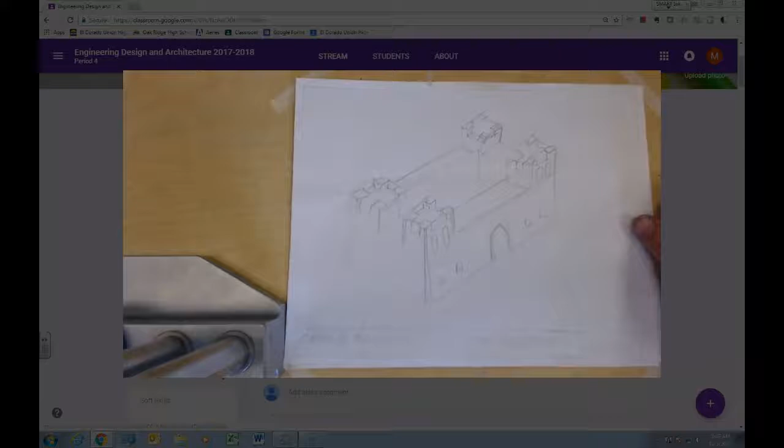When we did our castle in SolidWorks, I noticed a lot of you, when I took a quick look at your sketches, ended up with something that didn't look anything like your sketch. Some of you struggled once you got into SolidWorks because you went without a plan and started throwing patterns on patterns, and some of you dug yourselves holes while others did okay. Miss Musgrove, the architecture teacher from last year, subbed for my 5th and 7th period classes and did a demonstration about sketching. This is the sketch of a fictitious castle, an isometric sketch. Iso meaning equal, and metric meaning direction or measure, so equal measure. We're going to learn how to do that today.

I also want to show you examples of what I've done in my life. I rolled this cart in here as a demonstration. These carts that this box is on hold 3D printers that didn't have a place to go. We had 5 of them and needed a place to put them. These didn't exist at the beginning of the school year, but now they do because we made them in class. So how these went from an idea in my head to something in reality, well, I had to think things out a little bit.

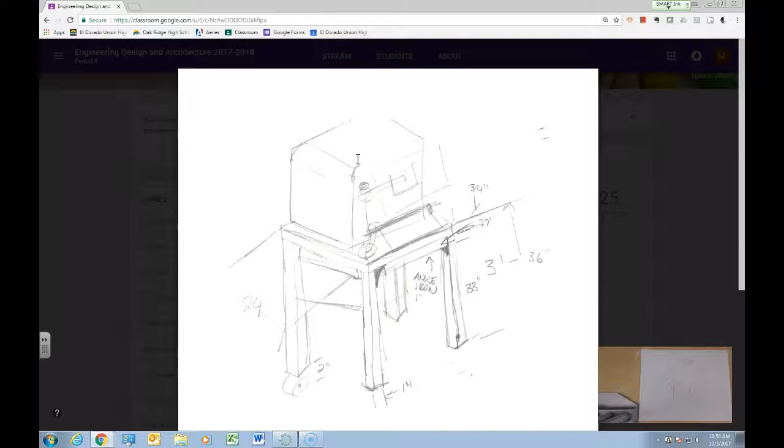We didn't 3D print this; we ended up cutting, sawing, and welding. But notice this started somewhere. This was back in July in the summer that I created this sketch on a piece of paper that looks relatively close to what we've got here. It's kind of faint and didn't copy well, but there's the monitor with this stand-up post thing. I even had to model up and draw these brackets that hold the monitor in place. I did end up going into solid modeling software to do these things, but the concepts, even those little brackets, started as sketches in my notebook.

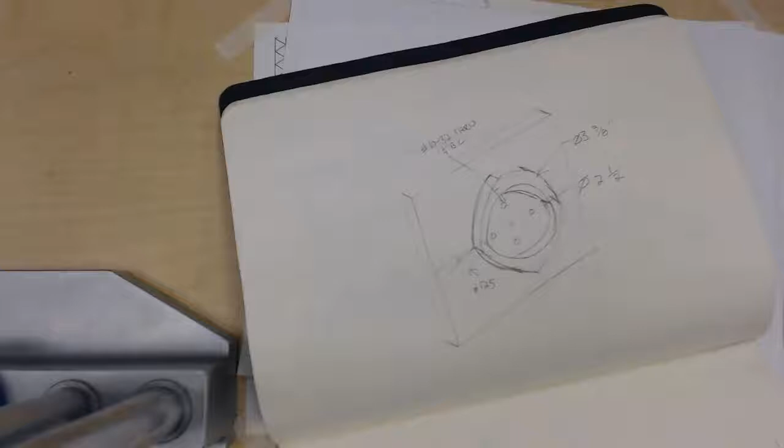Then I went to an isometric sketch by hand to get my ideas straight, so that when I went into solid modeling I had a bit of a plan before I started. And it came together pretty nicely. Everything fit. I was able to make solid models and generate G-code that ran the CNC machines out there to cut these aluminum brackets out. It was awesome, and it all started with a piece of paper, a pencil, and my brain.

So this is why we're taking a bit of a step back here, to give you some more tools in case the power goes out or something bad happens, or you don't have access to a computer and you need to get a concept started.

And I think you're going to be better off. So everybody cool? You got your ISO grid paper taped down to your desk there? That's easy enough.

Now what we've got here is your piece of tracing paper, okay? Everybody got a piece of tracing paper or missing that? Nope, so don't even worry. Who actually taped their piece of tracing paper down to their ISO grid paper? Nah, I didn't ask you to do that. Okay, so this is going to be free floating on top.

And this is actually going to come in a little bit handy here where we can shuffle things around. But anybody in here, you don't have to tell me, if you're colorblind - I had some students that had grayscale issues last year that struggled with this. Just let me know if that's a consideration for you. Hopefully the tracing paper on top will overcome this.

But okay, so this ISO grid paper - are actually, what type of triangles? I know it can be a little bit of a distracting thing here, but if you were to take a look at those triangles, what type of triangles are those? Equilateral - you got it over there, Rob. Equilateral, they are not isosceles. So isosceles would be two equal sides and one unequal base, but an equilateral triangle is sides that are all equal, okay?

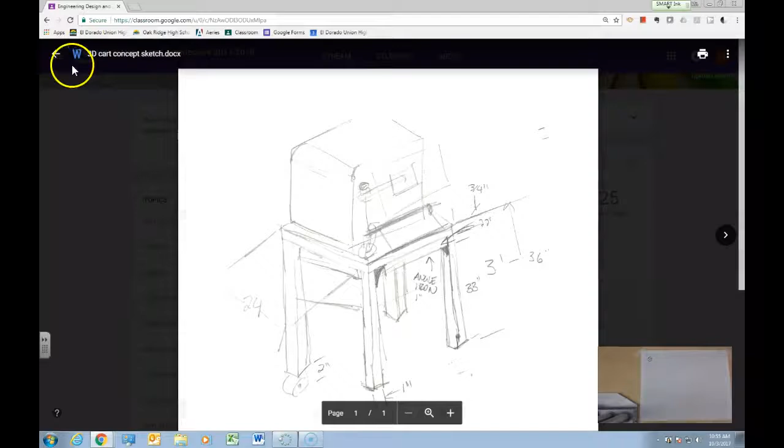Okay, so what I really need to do here, we're going to use Fred as our example because he's awesome and he's Fred. But we're coming back here. So we're going to want to take a look at Fred here, which hopefully is up on your other monitor. We're going to turn Fred from orthographic 3 view.

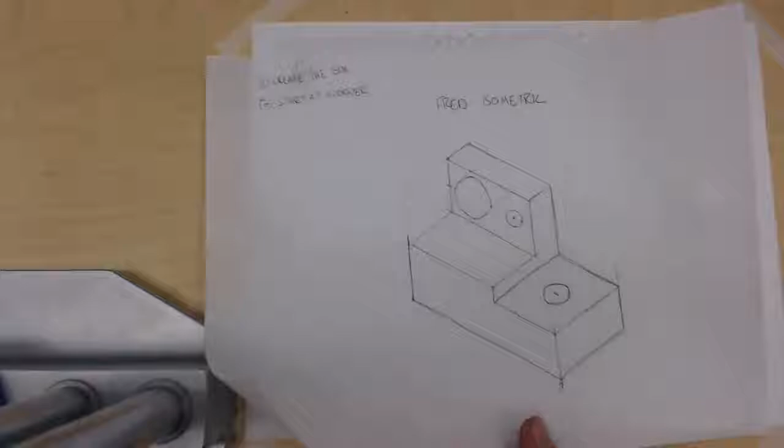So if you were a layperson, do you think if you showed this to your parents right now, they'd have an understanding of what the heck Fred is? No, right? But if you were to show them something that looked like this instead, they would be able to say, hey, guess what, that's Fred, right? So intuitively, this type of sketching makes a bit more sense than this other technical thing.

So make sure that you're able to look at this and refer to Fred here. I'm going to move this over to my other screen so I can refer to him. All right, so Fred's over on my other screen here. But you all got, I'm going to show you how we can draw something up like Fred.

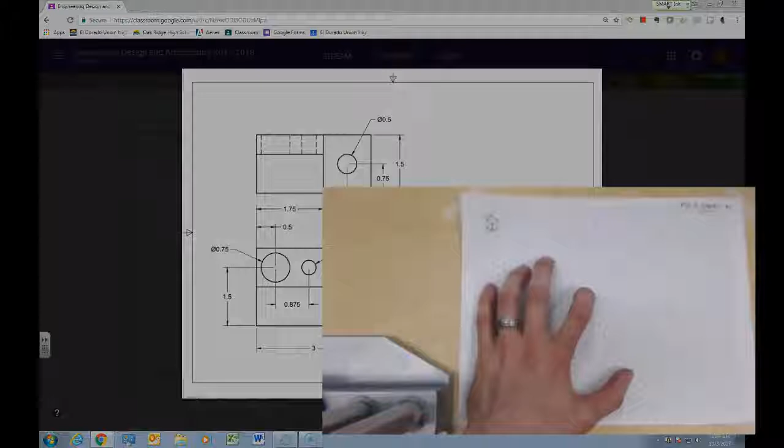All right, so here's what we're going to do: we're going to pick the highest point. We're going to start with either the highest point or the lowest point. I'm going to go for the highest point. So somewhere up, say right about here, and you guys can pick whatever you all want to do. You see I've got kind of a point up about right there that I've just created, right?

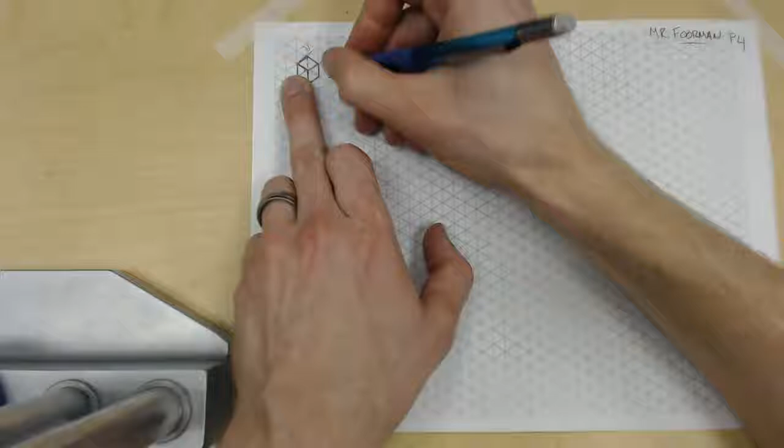Okay, so each length, if we come back and look at our unit cube right here, what we're going to call each one of those triangle shapes, that's going to be equivalent to 1/4 of an inch for us, all right? That's going to be equivalent to 1/4 of an inch, or 0.250, okay? I just did this recently, and it works out pretty well, all right? So each one of those is equal to 1/4 of an inch, all right?

So starting from this point here, and if we're going to go this direction, say, how many triangles do we want to count out to represent? That's going to be the 1.5 inch dimension, right?

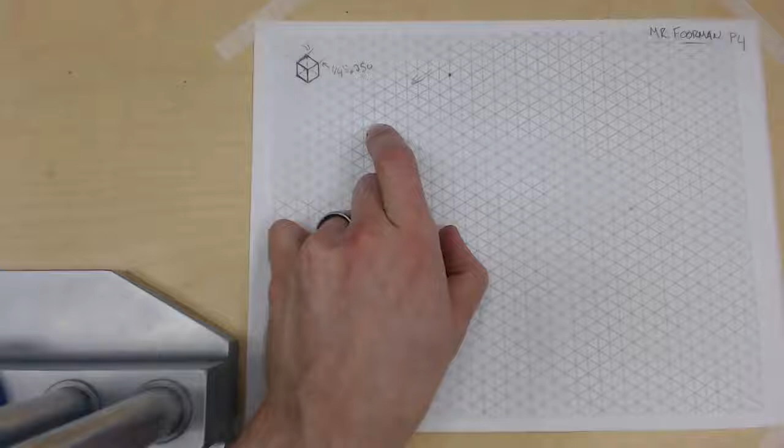Okay, so I think that sounds right to me. So let's try this here. I'm going to minimize this thing here.

So what we're doing right now is we're going to be drawing this 1.5 inch line right there, the thickness of Fred up at the top. I'm going to move this screen over here so I can see, then blow this back up.

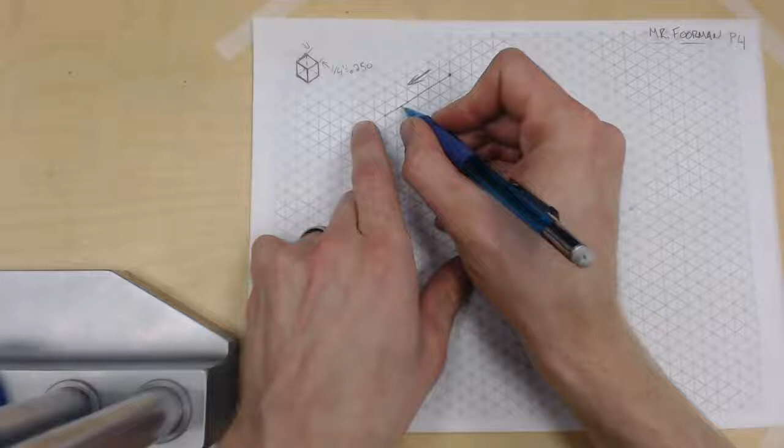So you guys count it out. That's 1/4 of an inch, that's 1/2 an inch, that's 3/4 of an inch, that's 1 inch. I'm going to put a little tick mark there just so I can keep it straight. And then another 2 - 1, 2, that would be 1.5 inches going this direction, okay? And then you can ever so lightly draw in between that there. You all catching that?

Okay, cool. So now where we theoretically are right now, if I actually pull up my actual Fred thing right here, can you all see that we actually started - that was this corner right here - and we've come off, and we'd be at a theoretical point in space, floating on Fred, somewhere right here, okay? That's going to be that point right there, if I align myself a little bit more.

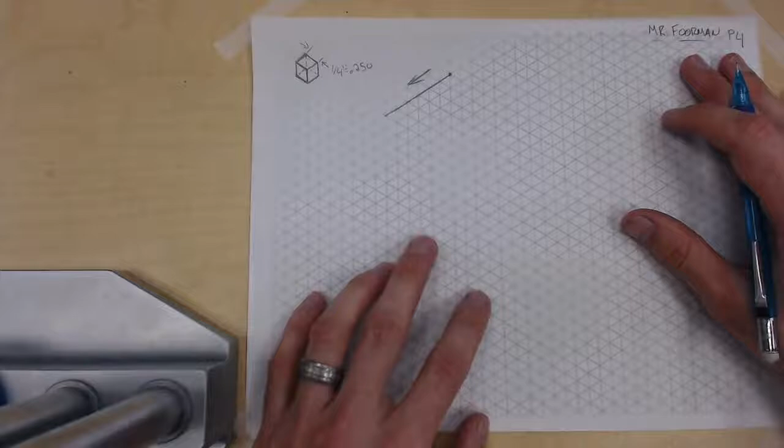So now what we're actually going to have to do is come downward with Fred. So now what we're looking at is from that corner - and I don't know how well my cursor is going to show up here.

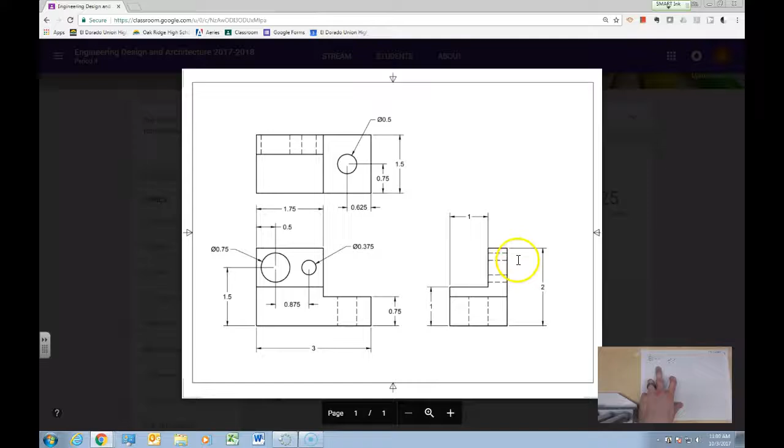We're going to be coming down vertically 2 inches from this point right here, going down that direction, equivalent to 2 inches. So how many triangle shapes is that going to be to represent 2 inches? 8. Very good, Lucas. So that's 1, 2, 3, 4, 5, 6, 7, 8. I'm going to put another little point down there, and guess what - I'm going to draw a straight line down right there, right?

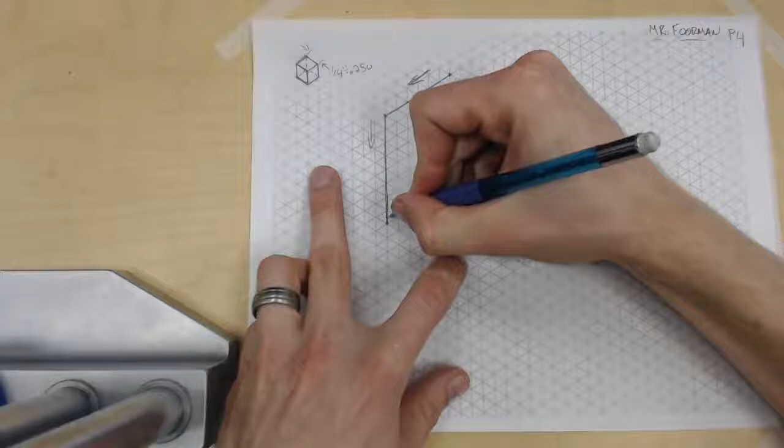Okay, cool. So now where we theoretically are on Fred is this point right here. This little point right here is literally that point on Fred right there. So now we're going to draw this line going that direction to the other point of Fred. So now we're going to do that.

How long is it, looking at your Fred drawing, from that point to the other one? It's 3 inches, right? Okay, so how many triangles do we have to count off - 12. Okay, so that's going to be 1, 2, 3, 4, and now we're going this direction, that way. 1, 2, 3, 4, that's an inch. 1, 2, 3, 4, there's another inch, that's 2 inches. 1, 2, 3, and 4, that is 3 inches away that way.

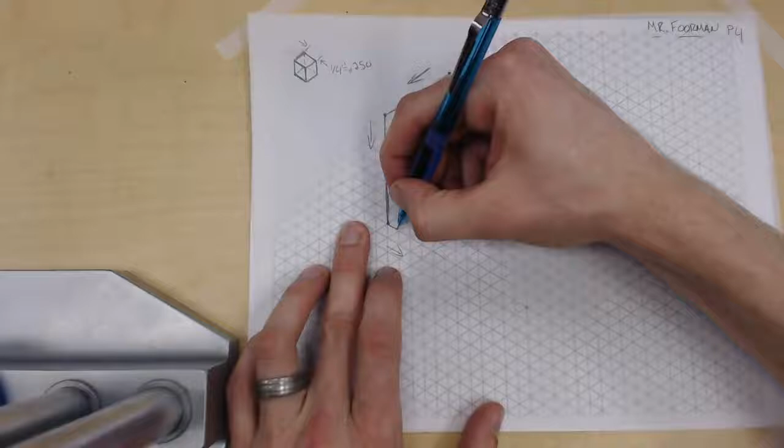And guess what? Now you can follow that line along right there. That is a long one. That is Fred's long side - dare say his good side, but whatever.

Alright, so what we have done now is draw that line from there to there. Catching it, Brandon? Not getting too caught up on fantasy football there? No. Alright, good. Alright, cool. So now we're at that corner right here.

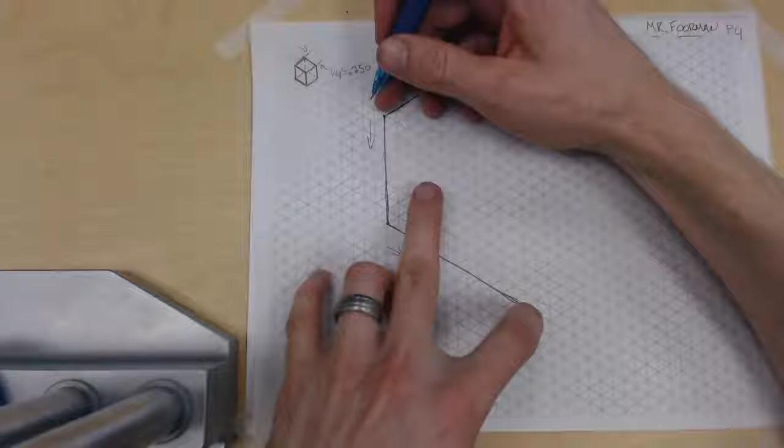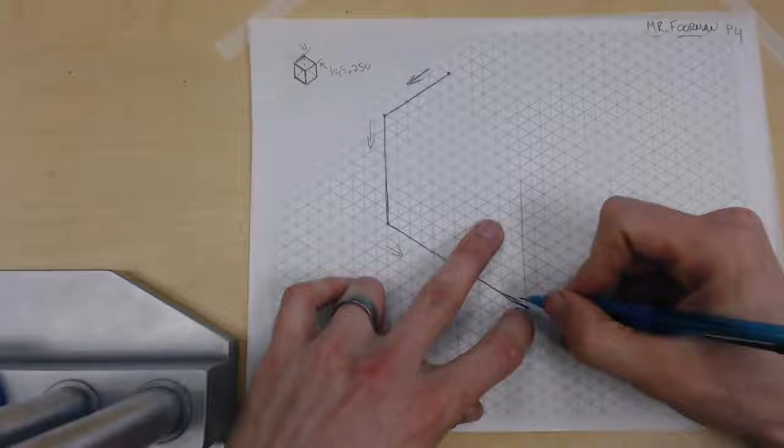Alright, we could get bogged down in the details of Fred right now, but what I'm going to choose to do is just make Fred this cube here. So if we come back up from this point, I'm just going to ever so lightly follow and trace this line back up here. Okay, so keep in mind I did these lines - we're going to be erasing some stuff away here.

And now what I'm going to do is follow this line right here coming along to right there. Okay, and then I can come back up to the very top point where we started, and I'm going to come this way right here. And then I'm actually going to come over here, and I'm going to come back down here. And notice how I'm always following those 30-degree lines and the vertical lines - I'm not digressing or diverging from those at all.

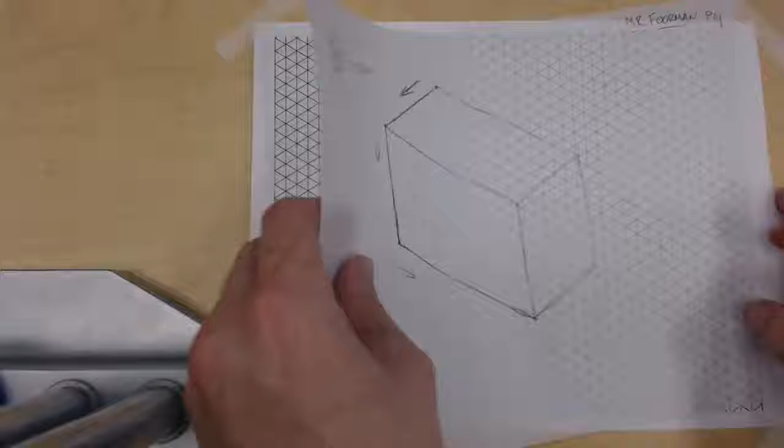And guess what, if you've accomplished that, then we have got - as I raise this off my thing, so the ISO grid paper drops away - who's got this? Who's got this looking shape here? Almost - Evan's got it. Hey, this is working out pretty well. If I lost anybody, as you raise off you're going to end up needing another piece of tracing paper, you got another one. Good, perfect. So what you're ultimately going to end up with - hey, nice.

This isn't exactly Fred yet, but it is the extents of Fred. You seeing that? If he was a solid block as he started, you had to start whittling Fred away, like he was a block of butter, and you had a...

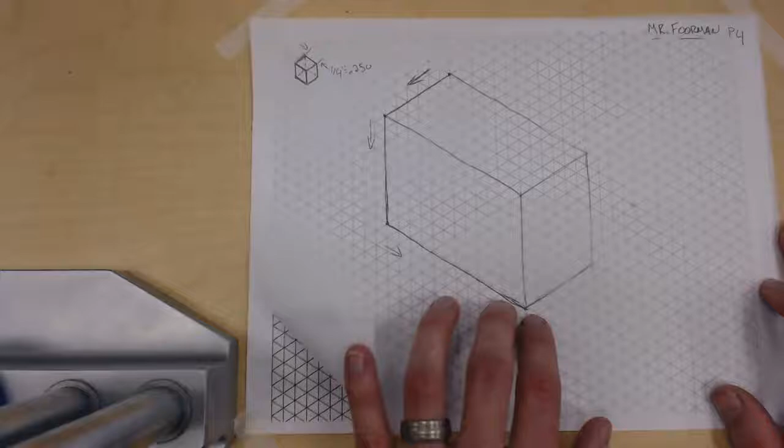Yeah, and then you would do the cut extrude feature and you'd hack them away. Exactly, Lucas, so you're starting to kind of get it here, right? So where do we want to start with Fred now to start hacking away and actually getting his features started?

Well, it really depends. As you get more adept at this, you can pick and choose, but what I'm going to recommend we do is start with a corner that we for sure have got solid material on. It would be a little bit problematic if we started, say, on that corner up there. This corner up here may not be the best place for us to start right now.

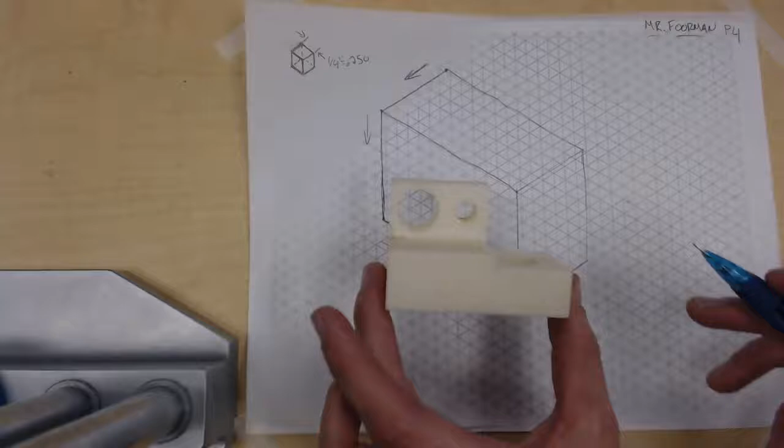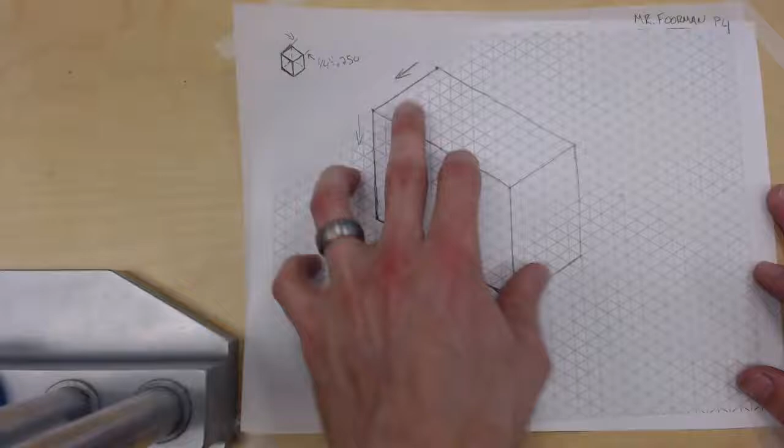But what I will recommend we do, let's start with Fred's corner down here. We're going to start with this leading edge corner right here. And this is why I did not tape down my tracing paper. You're going to see that it's actually kind of helpful that it's not taped down. It doesn't really matter so much, just so long as you realign lines that you've already drawn here, it's going to work out well.

So what we're going to do is start from this bottom corner down here. Okay, so now looking at your Fred drawing, what distance was it from that corner to this top corner right here? 0.75, okay. So how many triangles should that be?

3. Very good. So what we're going to do, starting from this corner down here then, we're going to count up vertically 1, 2, and 3 right there. And you can even put in a little dot right there if you want.

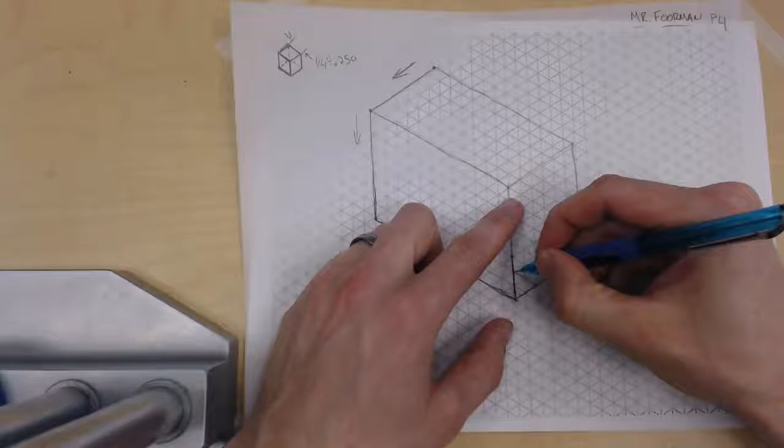All right, so what I am going to do now is I'm going to darken this edge in a lot more, right up to that point. Now, does it make sense?

This line that carries from that point up here, does that make any sense whatsoever now in our... Huh? No. So this would be the point at which, if you've got an eraser or need to borrow one or come up here and grab it, you're actually going to start to erase that line away. That line is going bye-bye.

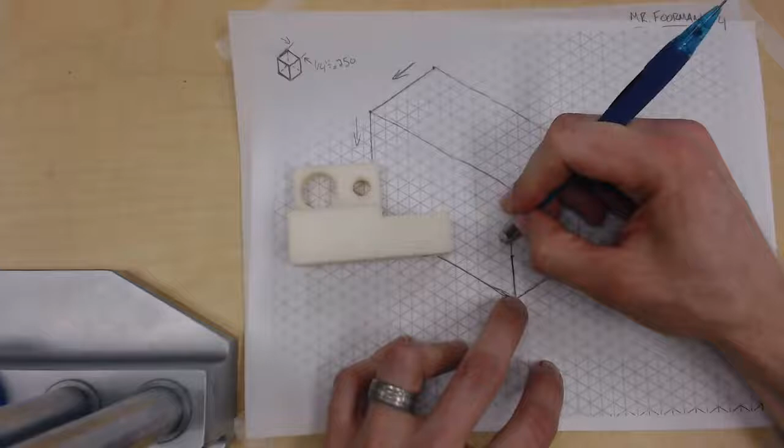Bye-bye line. And this vellum, this tracing paper, it actually erases away really nicely. It's very nice paper. Okay, so now we've got this little, what we've done right now then is we've actually drawn this little segment right there.

That little segment right there is this line segment right there. Okay, now we do have a choice. Which way do you all want to go, right or left?

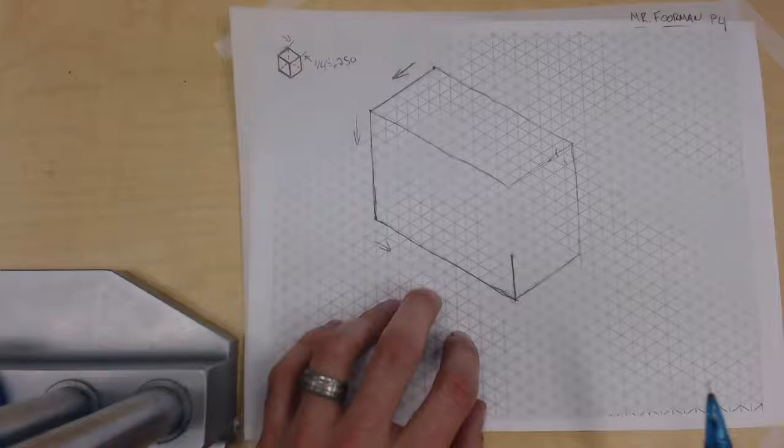We want to go left. All right, well, we'll see how this works then. Yeah, right, that might be a little bit easier, actually. Let's go right. We're going to go this direction, this way.

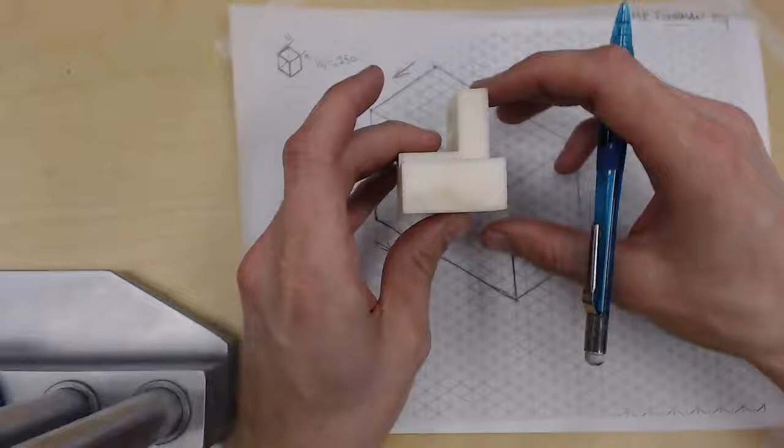Okay, we're going to end up going this way. So this maybe makes a little bit more sense now if we look at it from right view here. What we're going to be doing is we're going to be drawing this line right here on Fred. Okay, so from here, guess what?

Where do you think this goes? This line? Yeah, it's just going to cut all the way across because this line here goes the entire length of Fred. There it goes, just that way right there.

Now this line segment that I'm pointing out, from that point right there to this point down here, does that make sense anymore? Not so much. That segment would get erased away.

And even this up here, but we can wait on that. We'll erase it away. So, all right, so we've got that.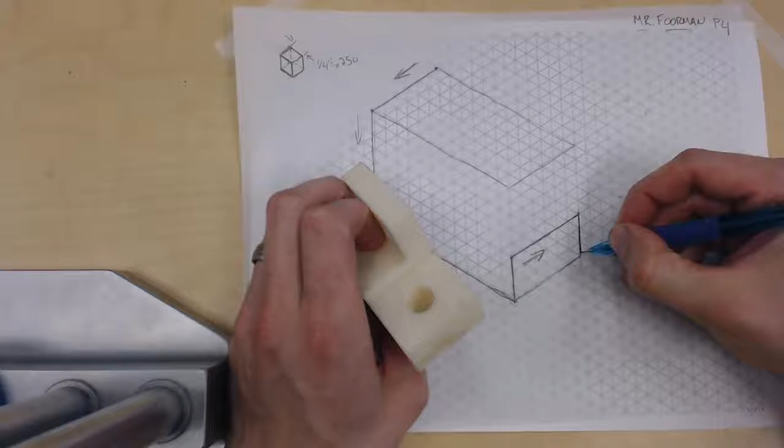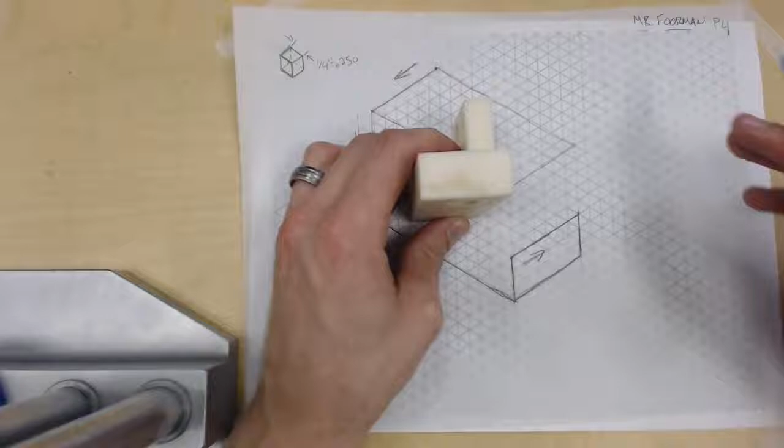And you can even darken in now that rectangle that we just drew. This right here we do, because guess what? That's representing that line, and that line of Fred. Cool, getting it down.

That's good. Okay, now we do have the decision from here. All right, it's starting to get a little bit more. So we've got our choice. We've either got from this corner right here to go that way, or this corner back here to go there.

We go up. Let's start from here and go on the front face of Fred, this direction right there, okay? So we're going to go, we could try it. Here's now where if you're starting to feel confident and think you can do this, I'll allow you the choice. But if you want to follow along, and if you lift your piece of paper up right now, what we've got is something that looks like that on our piece of paper. Sort of like that. That's cool.

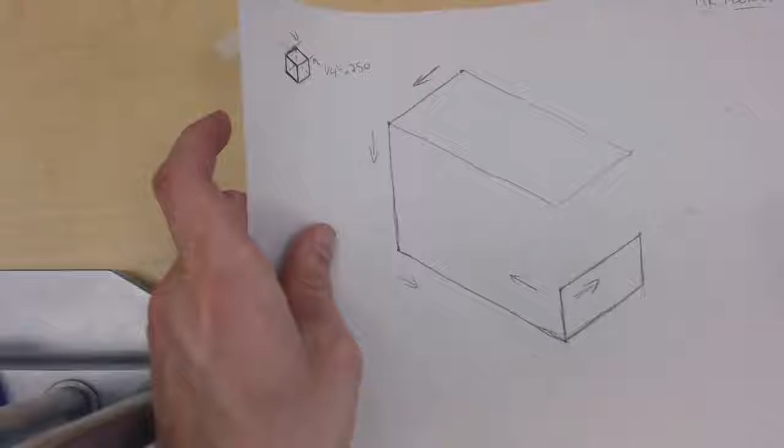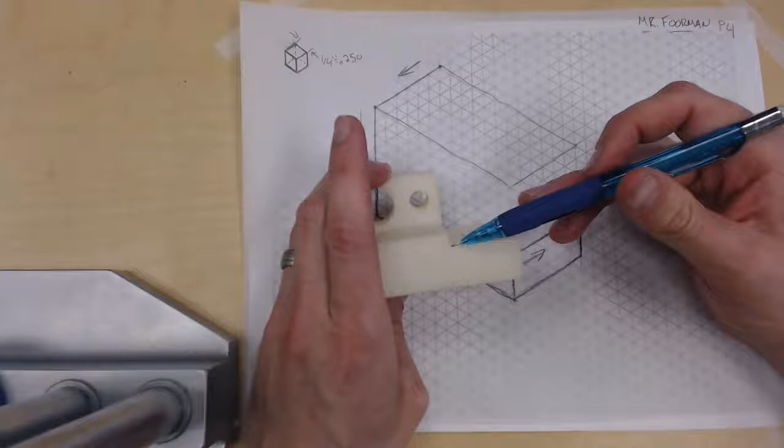Now, I'm going to do this right here. We're going to end up drawing Fred from this corner point right here to that point right there. Now we've got to come back and take a look here to figure out what's the length of that segment right there.

Well, yeah, so it's actually going to be 1.75 minus 0.5, so 1.25. All right, and how many grid points is that then? It'll be probably 6 again. No, excuse me, 5. Yeah, 5. We got it. So from right here, that's 1 triangle, 2 triangles, 3 triangles, 4 triangles, 5 triangles, and another little point right there. Yes, Jason.

Do you have another? Which Fred? You have 2? I do have 2 Freds. Yes, there is a second Fred floating here somewhere. You see it on the edge of my desk? I don't know. Well, you can have mine if you want. Okay, there's one right there. Where? Right there. Oh yeah, right by me. So you can have that one, Jason. If anybody else needs a Fred too, feel free to come around.

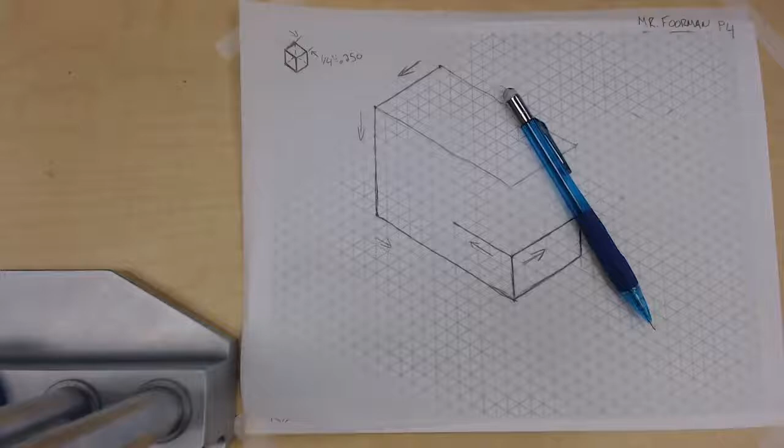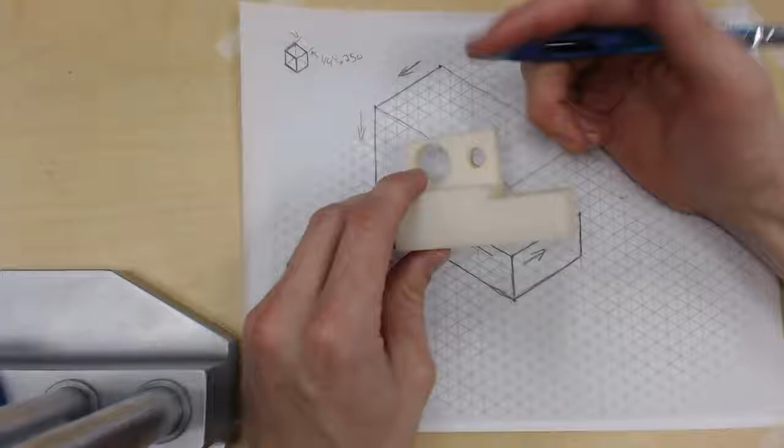So notice how I counted 5 right there, okay? And then Fred, we've got a little step up right here that I believe is actually a 0.25 step up, right? Okay, so what we're going to do here now is just vertically up that direction. We're just going to go 1 triangle up, okay?

Easy there. Oh, there. I don't know, Lucas. We'll tone it down, I guess, a little bit. Everybody else, I don't know. All right. So if we went there, that's that corner. We're coming up here. I remind you, we're on camera here. So anyway.

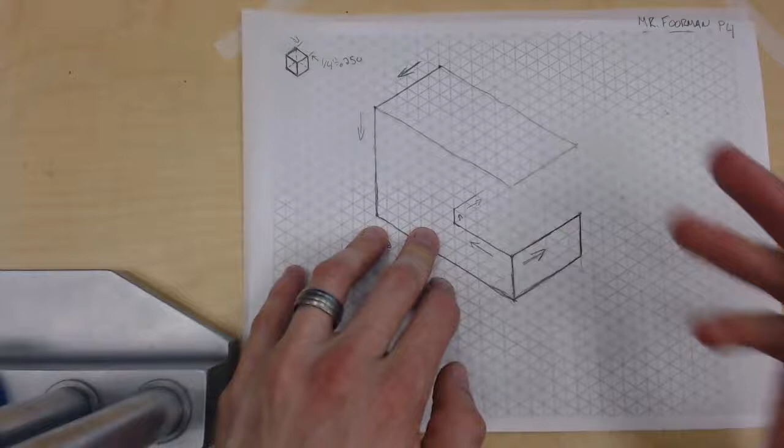Anyhow, we're now at that corner here, and we could come now start cutting across this direction back that way, right? So now we could either, you could do this lightly here. It would be somewhat of a mistake here if we carried this all the way across.

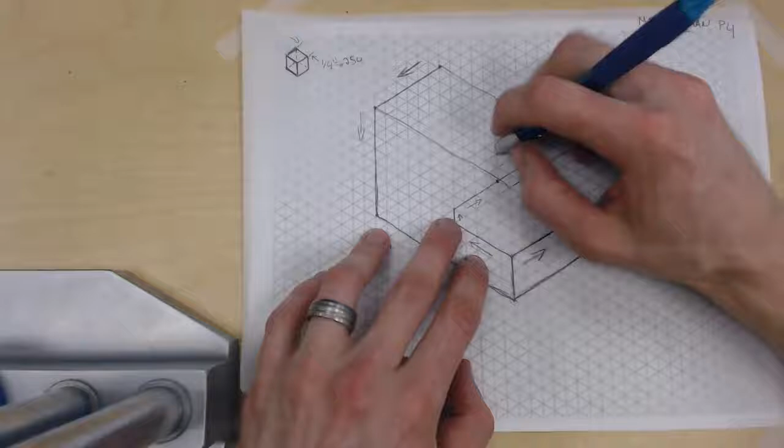But how thick? Oh, not so much. I wrinkled the paper. Oh, well, just go gently, calm it down, go gently. How thick, what was the dimension from here to there on Fred? 1 inch, right? So that's going to be just 4 triangles. That's 1, 2, 3, 4.

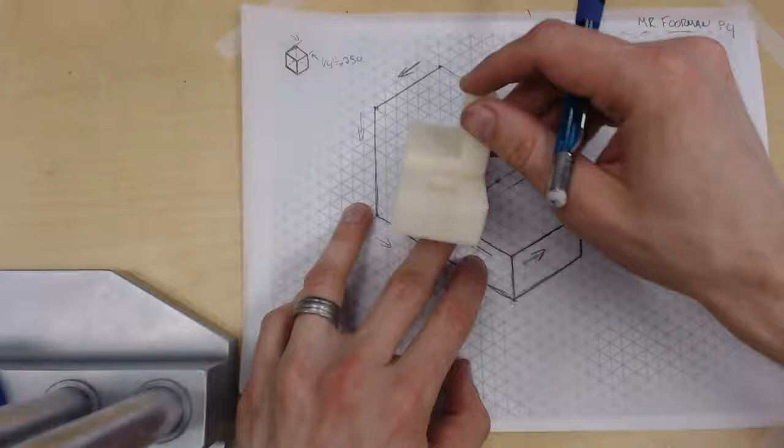Whoop, to right there. And now it's going to make sense, definitely, to start erasing some other things away. So this whole line right here no longer makes any sense. That goes away. That goes bye-bye. And now, do you see a solid... Where would the actual next line from this point go? From this point right here, where would that need to go?

So this point right here is this point right here on Fred, which looking at it from front view here would just go straight vertically up, right?

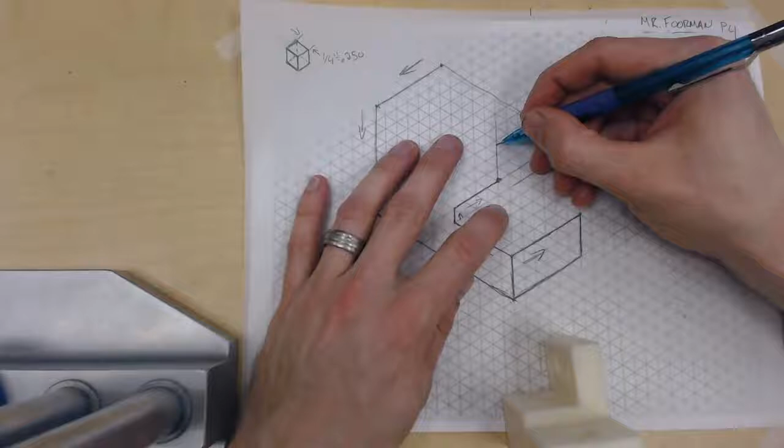But we need to know how far, sort of, I guess. But you could just kind of lightly come vertically here up. Just going to carry that lightly up here right now. I'm not exactly sure where to, but I'm just carrying it vertically up like that. It's starting to kind of make some sense here, sort of.

So leave that point just for a second. How about we come back to this? How about we come back to this corner right here? Not circles yet, I know. So that's going to be one other thing. We should probably erase that one away in full. That corner there gets erased away. Now guess what? I'm back at this corner here. What do we need to do from this corner?

Yeah, we're going to go this direction back. Coming back this way. But my goodness, how far? What makes sense? Well...

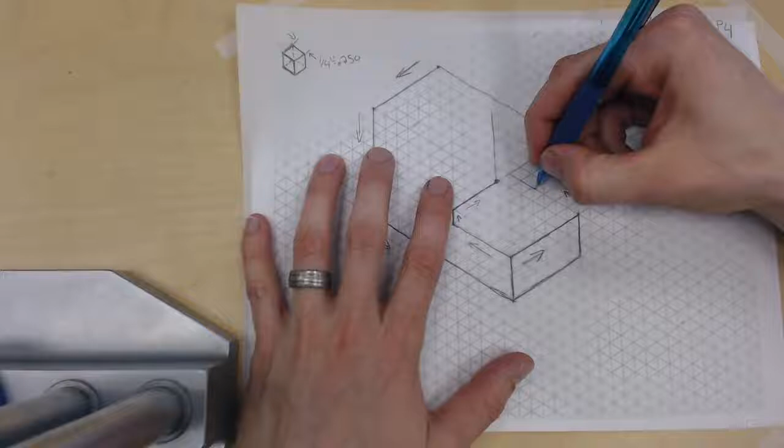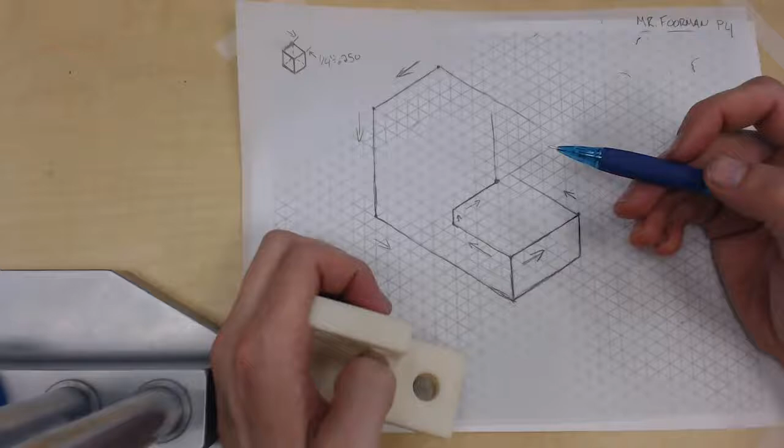Which point, where I've got my pencil right now? I made this block too short. Did you make that one too short, you think? I don't know, it looks okay. It's possible, they look both the exact same, if not. Well, so recount them and see what happens, if you need to make a little adjustment.

Not too big, but from here to here is supposed to be 0.5, so from here to there is going to be 0.5. So did I mess something up?

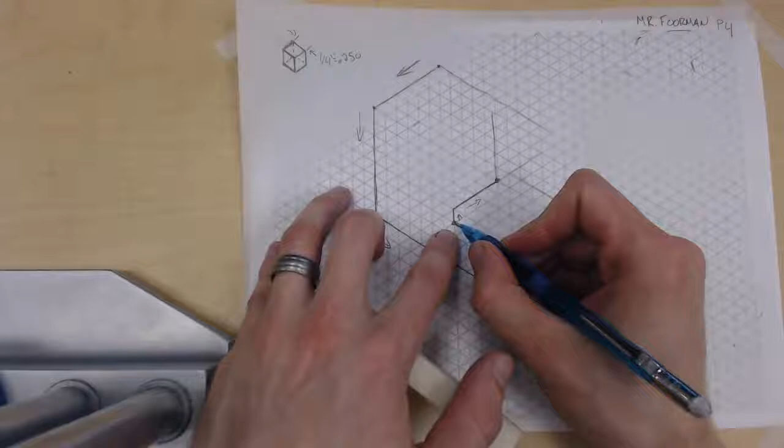It's possible. Well, the other thing too here is, yeah, right here, down here, we're kind of missing a line that we need to carry across. So from this corner right here, we actually need to carry this line that direction to represent this line coming across here.

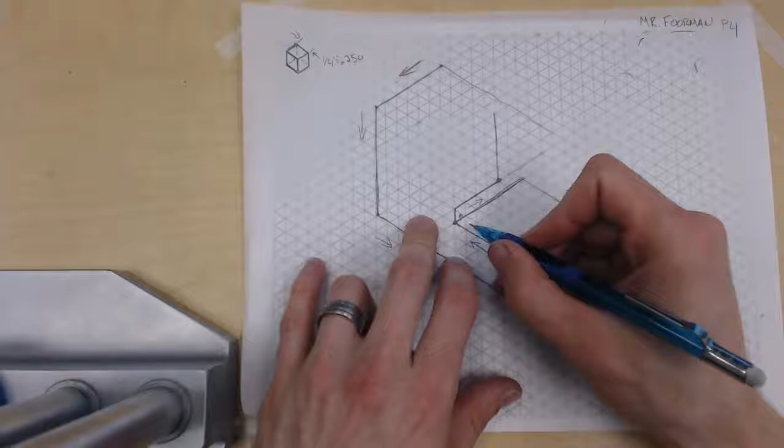Ultimately, this line here needs to be the same number of triangles as this line down here, which is 1, 2, 3, 4, 5, 6. So 1, 2, 3, 4, 5, 6. All right, so it carries to right there. Guess what? There we go. And if I darken that in a little bit more, that kind of makes some sense, right?

Okay, now if I got my corners off here a little bit, guess what? Then this actually creates, do you see them, Lucas? There's one triangle right there, and there's a second triangle right there. Do you see on my one triangle, two triangle? And that makes up a 1/2 inch, right?

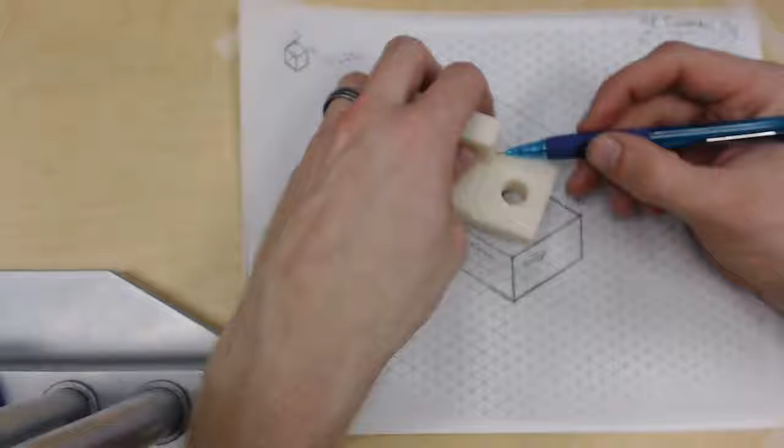So from this corner right here, that corner right here, we come up vertically, all the way up, so we'd actually intersect. This segment right here was one of the original segments that we had drawn when we were first boxing Fred out. You see how that comes up vertically to here?

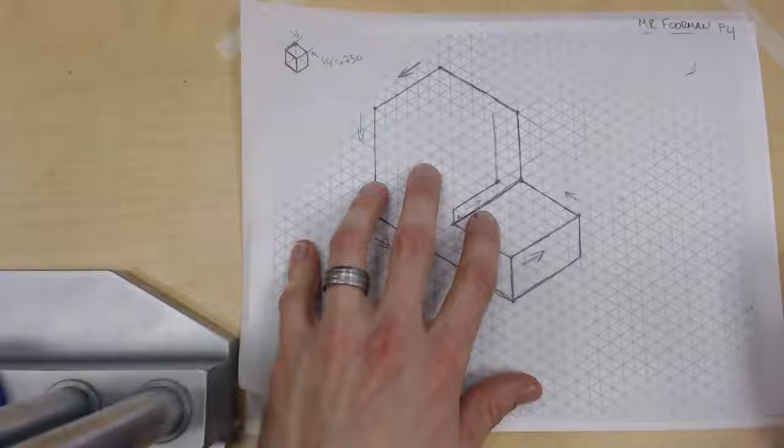Okay, and then from this corner right here, how many triangles do I need to count back to give the thickness of this up here? 2. No, 2 is good. And that's coming this direction right here.

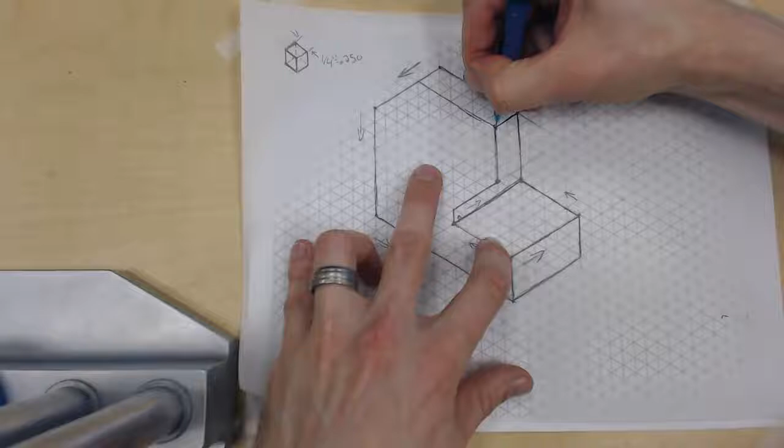Guess what? I carried that line a little bit too far. And here I am. Alright, and guess what? From this corner here, guess what? Fred carries all the way across right there. That's the top face of Fred right there that I just drew. This right here, okay.

And then that establishes that if I come, this point right here is that point right there.

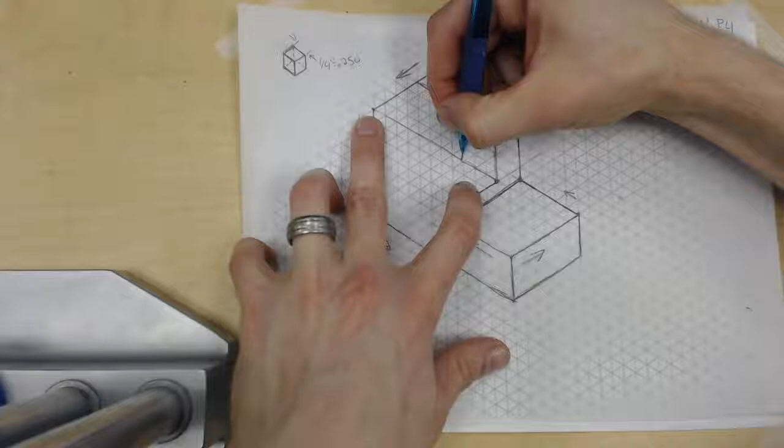Thanks, Fred, you have provided so many lessons for me this year. That's awesome. I should, I owe Fred royalties. We'll set up like the Fred Educational Fund or something. We could have some Fred interfacing parts, sure, we'll come up with some useless Fred widgets and accessories. He's kind of got two different sized eyes or something. Yeah, hey, that would be an actually great idea. We'll come up with some interfaces to Fred. How about that? But we don't have to draw them.

Was that a line I already made? Yes, actually, technically it was. It's just coincidentally aligned to that one right there. But not all of it is needed, because what we would do then is we would carry down. Do you see how things start all of a sudden making their own kind of logic and sense? I would carry that line down there, and that gets erased away. Okay, so that's going bye-bye.

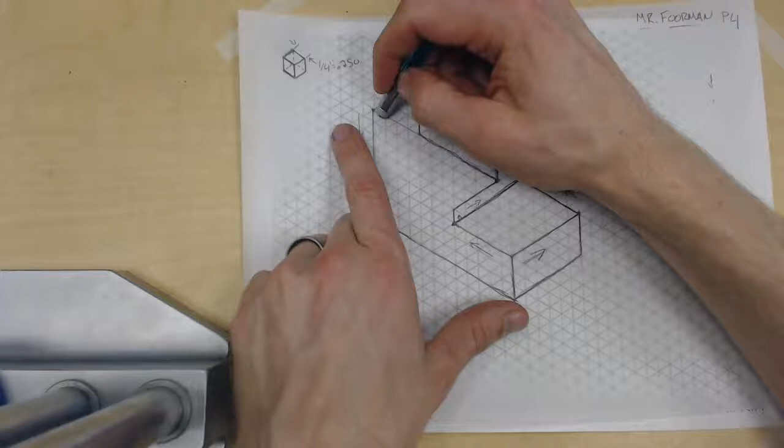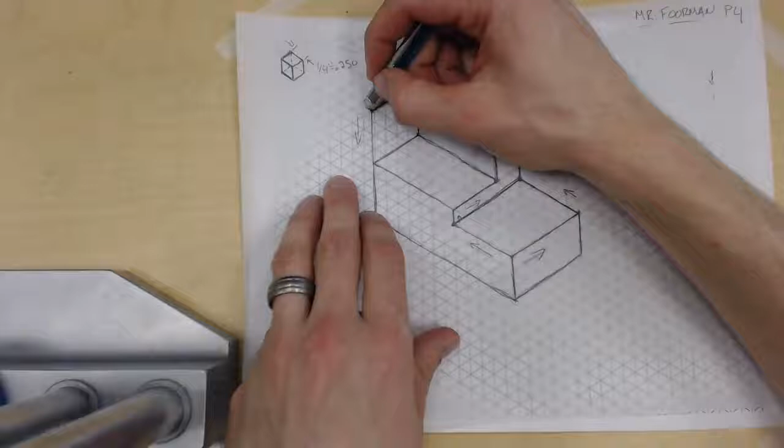All right, and then we can carry Fred out from this corner right here. I've just got to follow that line to right there, and then I come back this way there, and then, yeah. If I erase this away, so that needs to go away now. There, aha, voila, if I lift up, oh, Fred has appeared out of nothing. Or at least most of Fred. But we still got to put some holes in Fred, right?

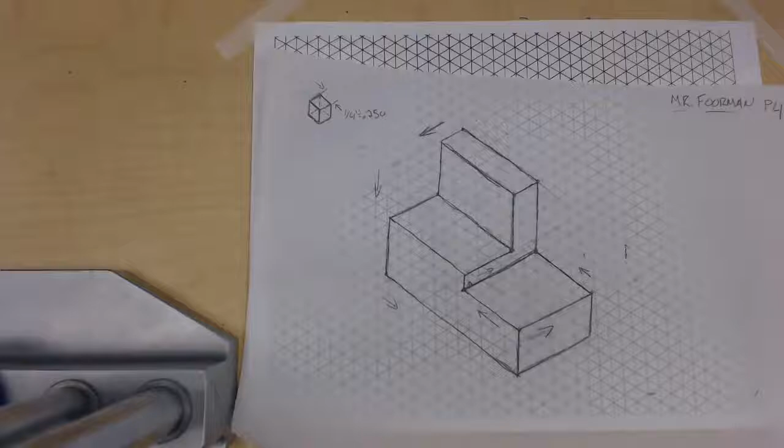We even got hidden lines going there in the background. You smarty pants, with little dashed lines to do hidden things behind the back. All right, yeah, Brady's got it. Nice. All right, so the holes in Fred here.

Now these numbers get a little less. We're going to have to deal with half units here coming up. But never fear. Because we didn't tape this down, we can shift things around a little bit.

I won't belabor the holes too much here, but we'll talk a little more. How do you think these holes are going to come out? Are they going to be perfect circles, or something else? Perfect circles in isometric view actually end up as ellipses. They are elliptical shapes.

There are some drafting tools I don't have - these are perfect circles here, like a perfect circle, great band from the early 2000s or 90s, whatever. But there are drafting tools that are actually ellipses. Don't sweat it here, we're just going to roughly sketch. It doesn't have to be perfect.

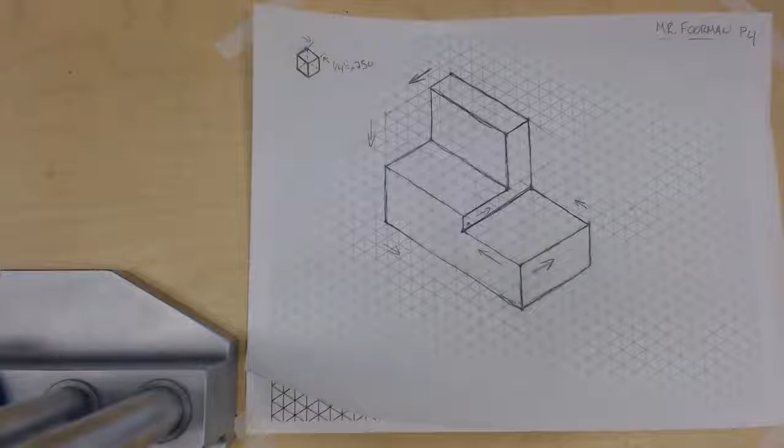Let's deal with Fred's hole feature that is on this face right here to start. It's going to be a little bit nicer than the other two. So we agree it is 3/4 of an inch up from the front face, this leading edge face here. And it's actually 0.625, which is 5/8.

So 5/8 is equivalent to how many quarters? 4/8 would be 2/4, right? So that would be 2. And then we've got to go another half of an increment here to get that 5/8. We'll do that here in a second. Have I confused anybody with that?

Well, let's go in the easy direction first. From this corner right here, it's 3/4 of an inch inward, which is just 1, 2, 3 triangles. I'm just going to make a little tick mark right there.

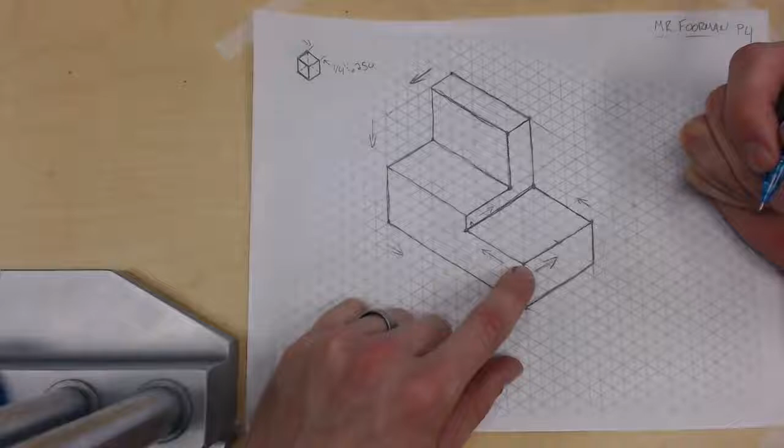But then from this corner, what we've got to do is go 2.5 triangle lengths here. So there's 1, 2, and then we're going to go halfway on the next one, and I'm just eyeballing it here. So right there's that marker. And if I carry up this way, I'm just going to go lightly.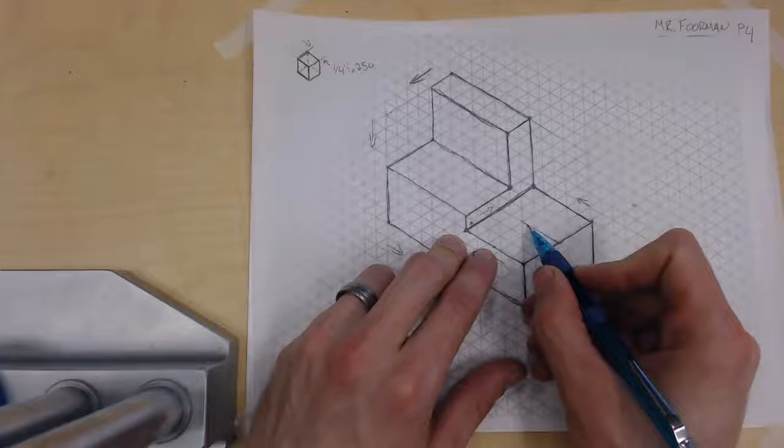I could either eyeball it straight across here and go halfway, or do a half tick over. See how I shifted my paper just a little bit? You see how I did that? So now everything's aligned - my corner, it was going to be 2.5 triangles to go from this corner that direction. 2.5 is going to give us the 5/8 that we want.

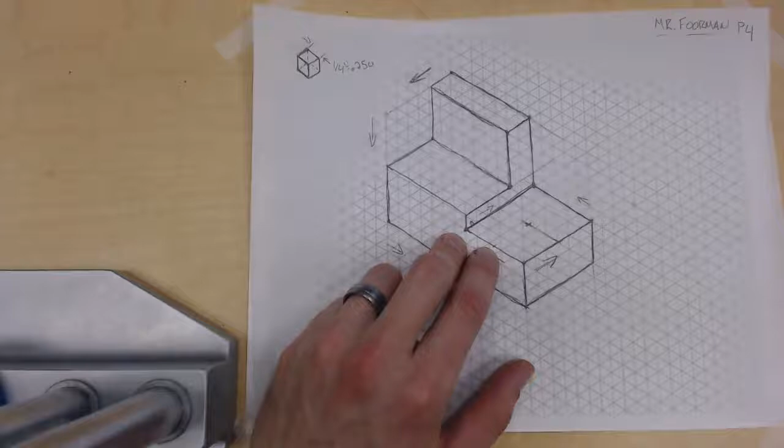So what I can do - notice how I did that little half tick mark right there? I could just carry that up and come right here, and that's actually going to be the center of the circle. The other way, it was only 1, 2, 3, if you're looking at your screen right now, Lucas - 1, 2, 3 gets us right there. But what I'm drawing here is like the center, 30-degree lines, X marks the spot - that's the center of this thing.

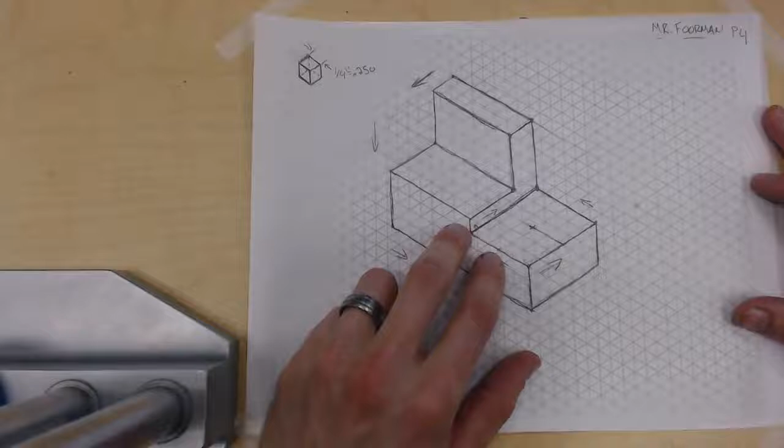But now I'm going to shuffle myself, sliding my paper. Notice how this way right now, the corners here are meeting up nicely with the iso grid paper. A little trick here - I'm going to shift so that X I just made is lined up with the iso grid paper right here. Because what was the diameter of that circle we need to make on this face? Half inch diameter, was it?

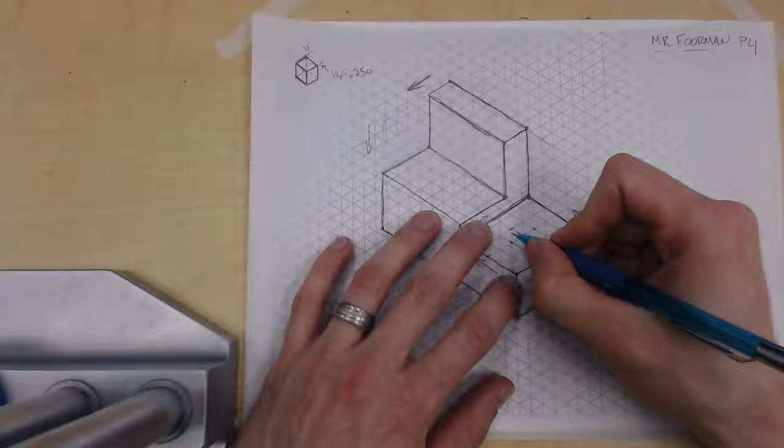0.5? That means for a radius, we need to count one triangle one direction, and one triangle the other way. If I lift my piece of paper up here, do you guys see that right there? Kind of what I got going on? Because what I'm going to do now is just roughly make an ellipse, kind of as cool as I can. It really goes from a tangent point here, and comes up. I'm probably not going to do the most perfect job of this, but there's one little elliptical thing, and there's another kind of elliptical thingy.

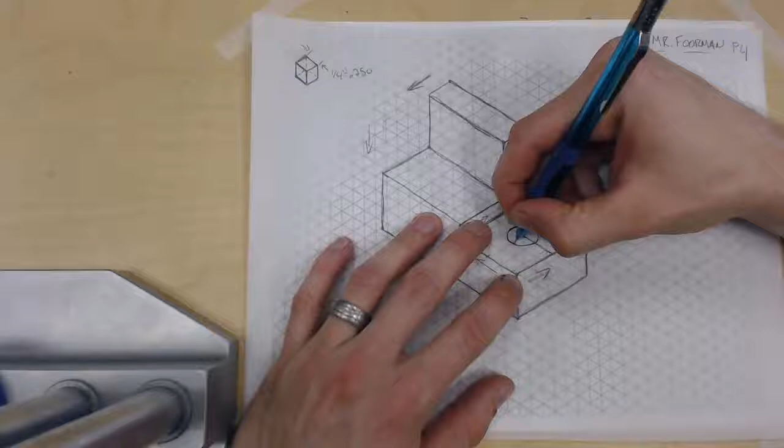There's another elliptical shape, my last fourth one here. You're going to see that I can kind of roughly get that. So that looks, hey, not too bad, not horrible. As I lift that up, I've now got roughly a circular shape, an ellipse that would represent a perfect circle if you're looking at it that way.

But notice even as I do this, even if I were doing like an isometric view this way, notice how it does start looking elliptical.

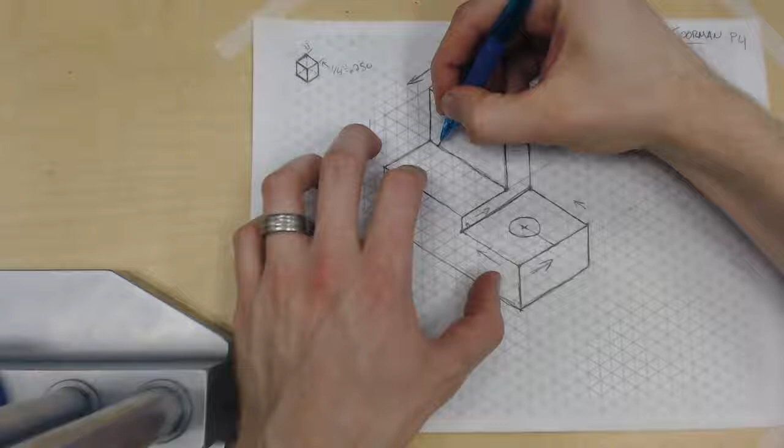But now we can also start talking here. I'm thinking of a word that starts with P that would relate to this. Perspective, okay? Do you think that there's any actual perspective in an isometric sketch that we've got here right now?

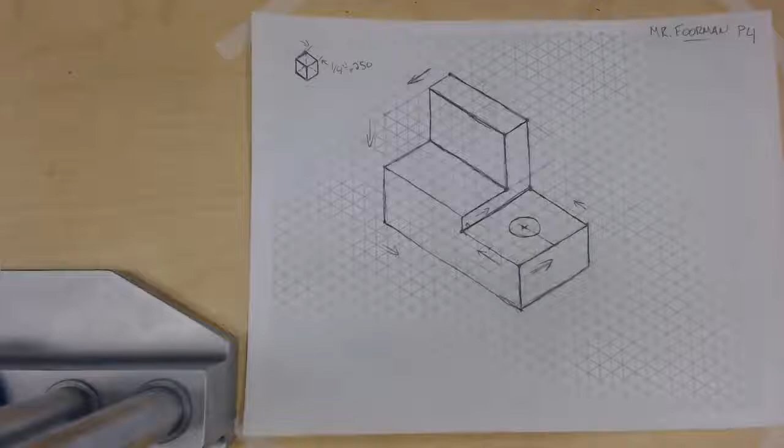Yes? No? What I mean by perspective is if you were to actually look in real life, if you look out to the horizon, things shrink as they get further away from you, right? Yes. Do we get that with isometric sketching? No.

So these are all actually, there is no perspective, there is no foreshortening. These things are literally, if you were to take a look back at Fred, the orthographic drawing here, where everything is exactly the right size, what we've kind of actually done is refolded up these views of front and top, but kicked them on a 30-degree angle here, so that we get the optical illusion of 3 dimensions that we can understand here, that everybody just kind of knows. But it's not actually like a realistic thing, like a big building that's often at this point would be foreshortened.

But you still would agree now that whatever you guys have created here, hopefully, if you took it to your parents and said, hey, here's Fred, pick Fred out of a lineup of parts sitting in front of you, you think your parents would be able to do that? Yeah. Okay.

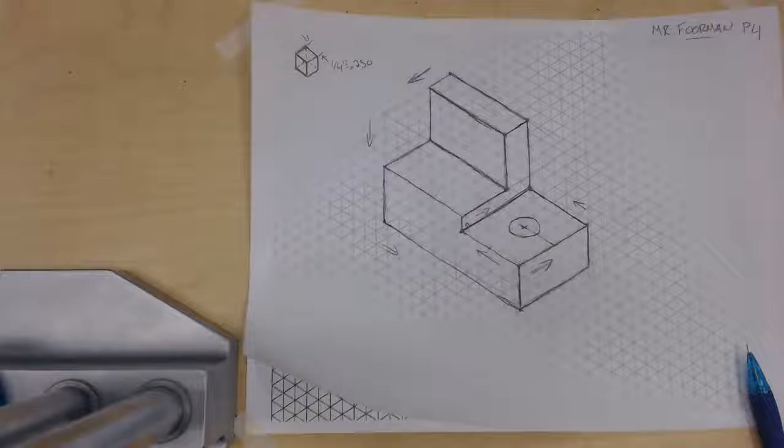So this way, to get a layperson or somebody else that doesn't have a lot of technical understanding, you're trying to impress a customer, this is an amazingly good technique to use, right?

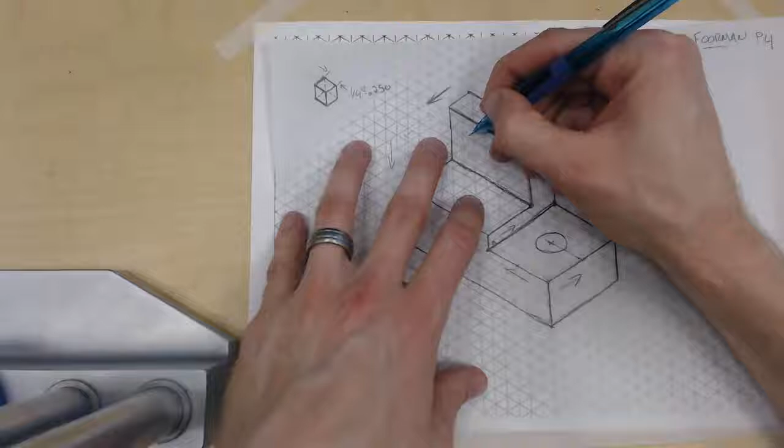So I won't belabor it, I'll let you guys see if you can get these 2 other holes here. It's a little bit more challenging and the numbers don't quite line up super pretty. But if you even just wanted to eyeball in where to put the holes, I have a feeling you would be able to do that and kind of line up where Fred's other 2 features need to be.

So I'll challenge you guys to think that through. It doesn't have to be perfect. By no means does it have to be perfect. Yeah, sure, that looks good enough to represent the fact that there's holes in there.

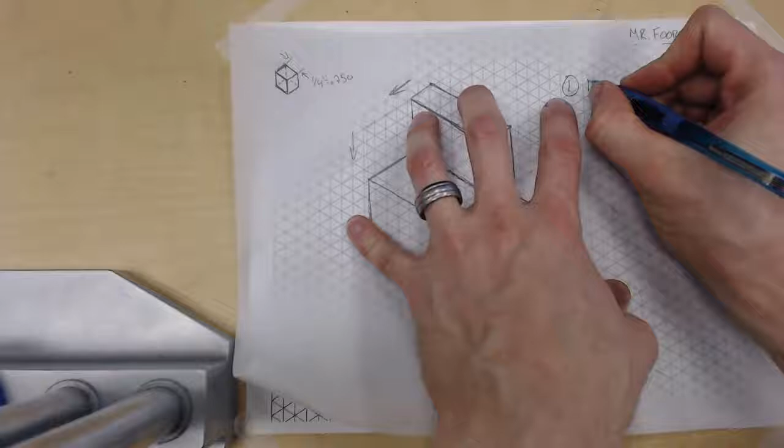So Fred the rectangle. You want this? Yeah, give me a second here. Actually, what you can do is put it in. Jason, what I'll have you do is walk around, do the 4th period to grade, and put that in here. Sounds good, all right?

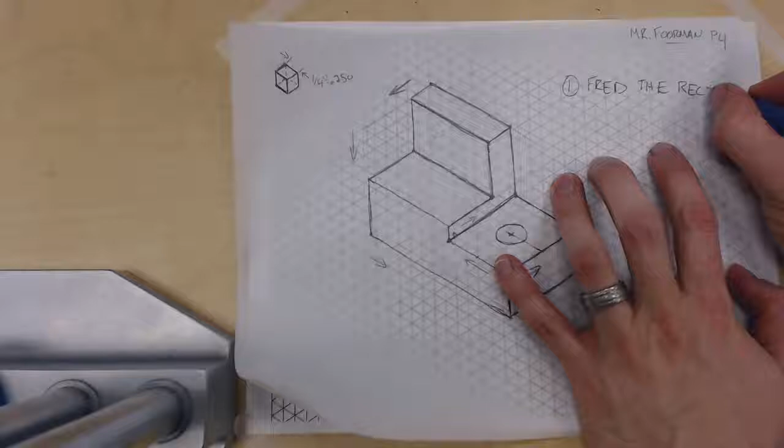So, Fred the rectangle, or part the rectangle to start. Then we kind of worked around the corners from solidness. So what we did then is worked around the corners where there was solid material.

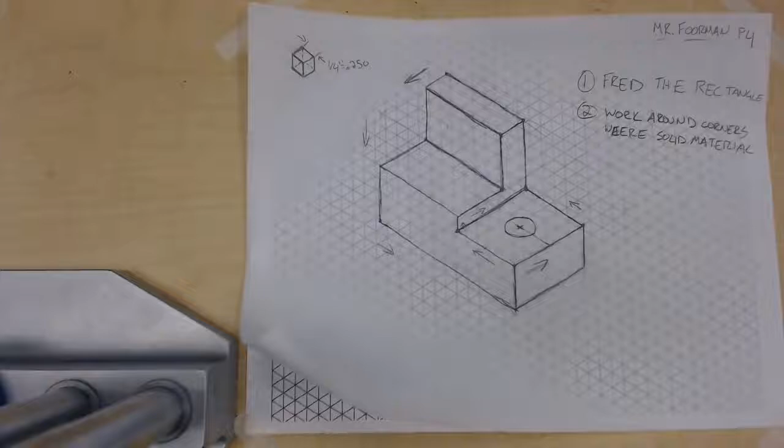All right, and then from there we had to kind of use our things. But we were always working also on the verticals and those 30-degree lines. We didn't diverge from that on this simple example. We could on other ones, but we're going to keep it very simple to right angular shapes right now.